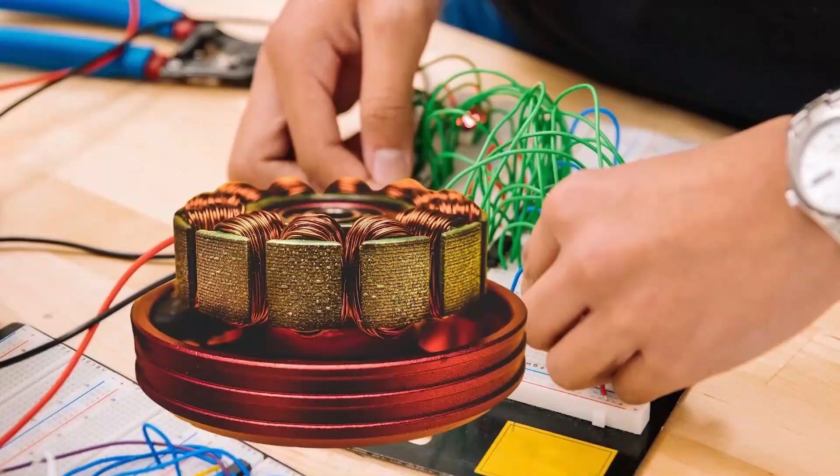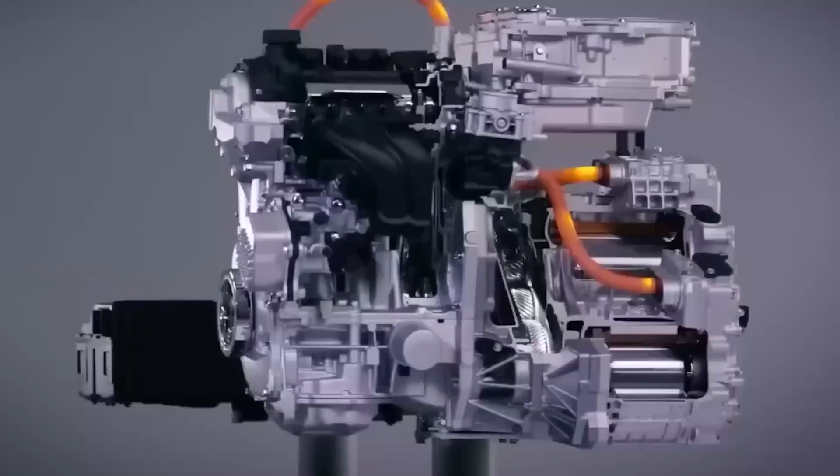With this idea in mind, he decided to create his own electric motor that did not rely on rare earth metals. After researching and experimenting, he found the solution in adapting a synchronous reluctance motor. Despite not having access to advanced resources, he managed to create a working prototype using a 3D printer and his

ingenuity. This achievement is not a surprise considering that the youngster had already completed more than 60 engineering projects, including robotic hands, a go-kart, and high-speed running boots. His passion and dedication make him an engineering prodigy.

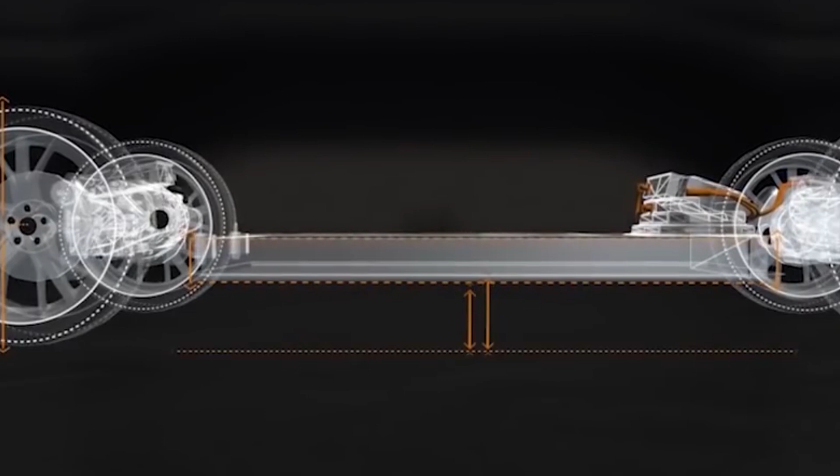Robert Sansone's electric motor started out as just another project, but recognizing the potential in it, he decided to turn it into a science fair project. His enthusiasm led him to compete at different levels until he reached the Regeneron International Science and Engineering Fair, where he won the first prize of $75,000.

With the money, Sansone plans to enroll at the Massachusetts Institute of Technology to further refine his model. Although he hasn't revealed all the details about how it works, he hopes car companies will take an interest in its electric drive to make a sustainable difference in the creation of electric cars.

However, the automotive industry is changing towards a 100% electric future, which brings with it the problem of the use of components such as rare earths in motors and batteries, elements that produce environmental and social impacts. Currently, more than 90% of rare earths are mined from China, which poses a challenge for the replacement of all existing vehicles with an electric one.

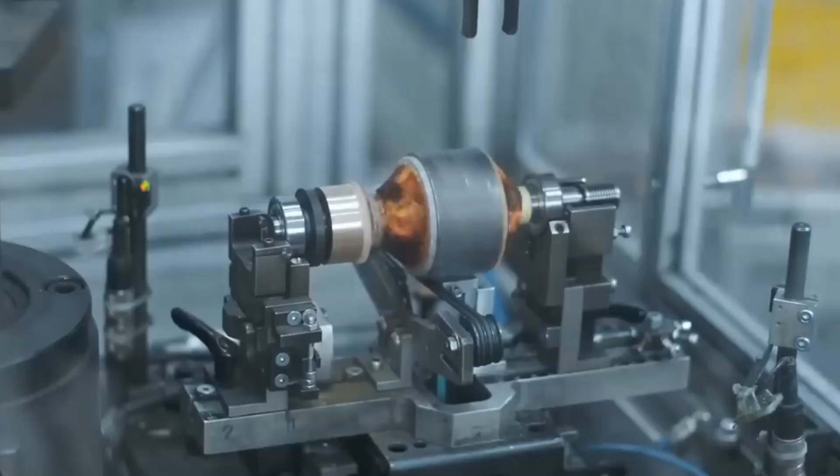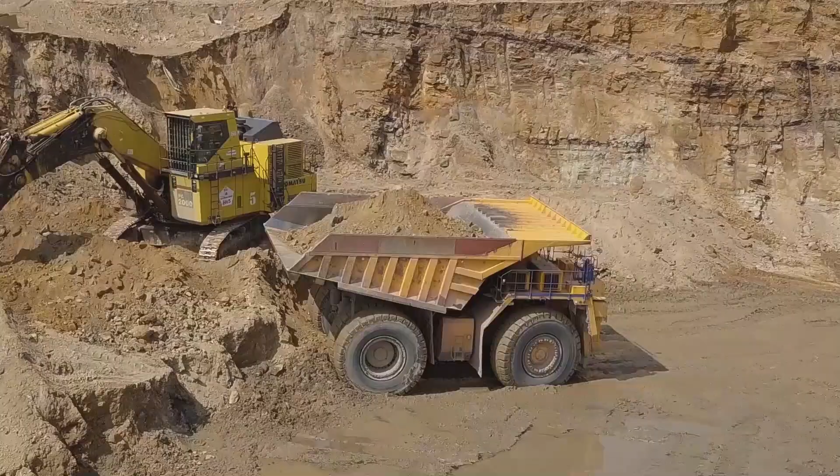A University of Michigan professor explained that many of the materials used in engines are mined in China, which makes their price tied to trade status with that country. Rare earths, from which 17 chemical elements such as scandium, yttrium, and lanthanum are extracted, are essential for generating clean energy, but they are also highly polluting. Although they are found in nature, their low concentration makes their commercial exploitation difficult.

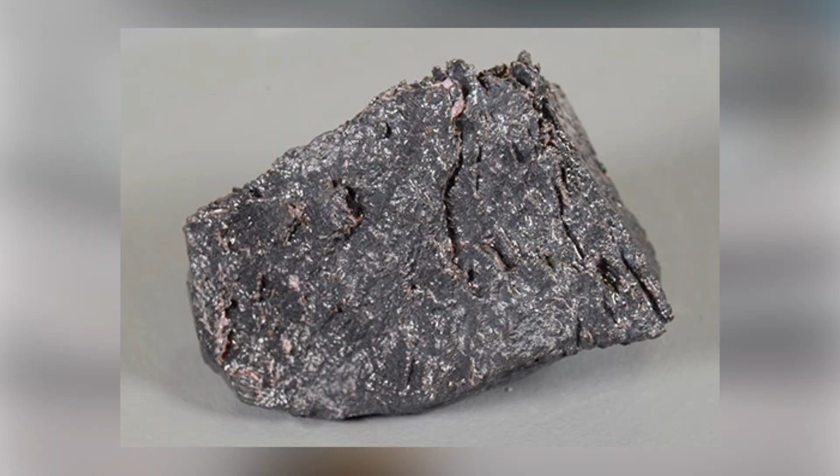Rare earth metals, such as neodymium, dysprosium, and terbium, are used in the construction of electric motors and electronic devices, as they are used as magnets to prevent overheating and improve performance. In addition, the military sector also depends on these elements. U.S. President Joe Biden has a goal for 50% of cars sold by 2030 to be electric, but current demand for rare earths makes this difficult to meet.

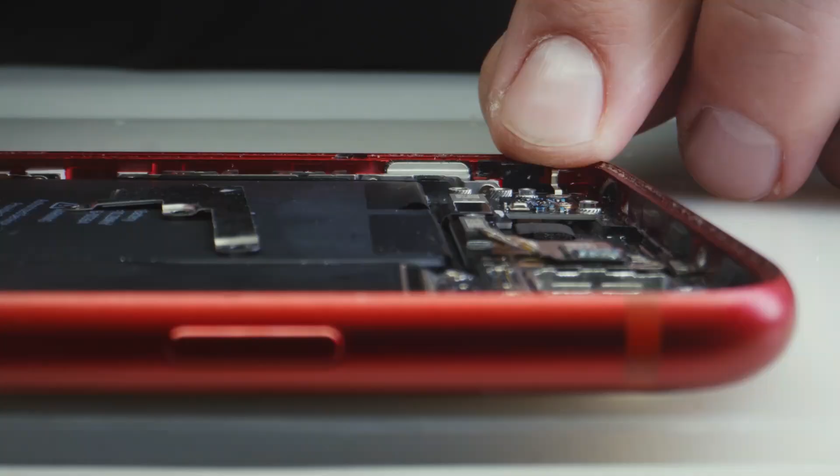Furthermore, countries like Germany, Japan, and Korea also require large amounts of these elements for their electrification goals. Due to shortages in the United States, the possibility of collaborating with Australia and Canada to obtain and process rare earths in the state of Texas is being explored.

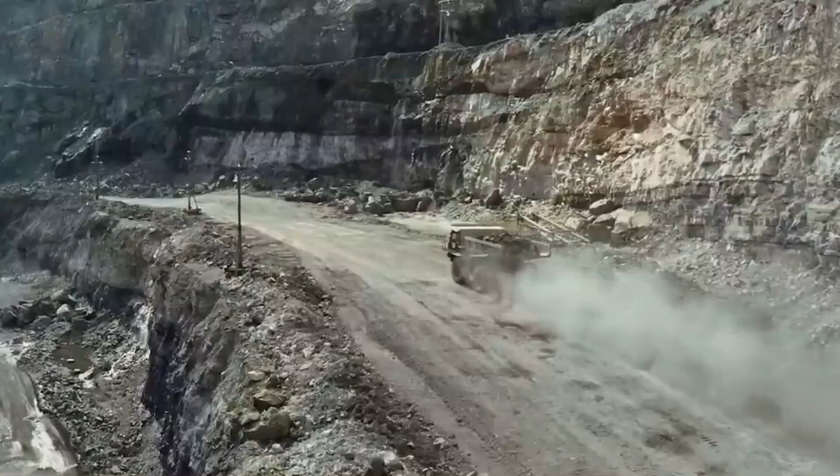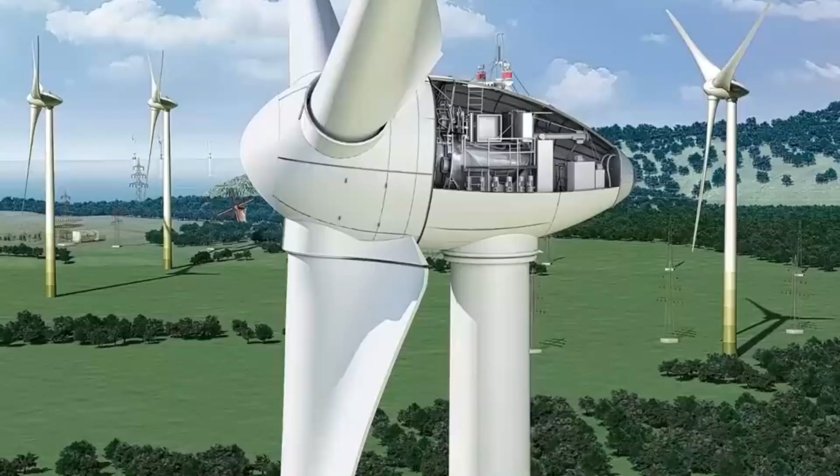Although we face challenges such as high production demand, high costs, and environmental pollution associated with the use of rare earths in electric motors, removing these elements from the equation could solve many of these problems. For this reason, Robert developed an alternative with his synchronous reluctance motor that does not require rare earths.

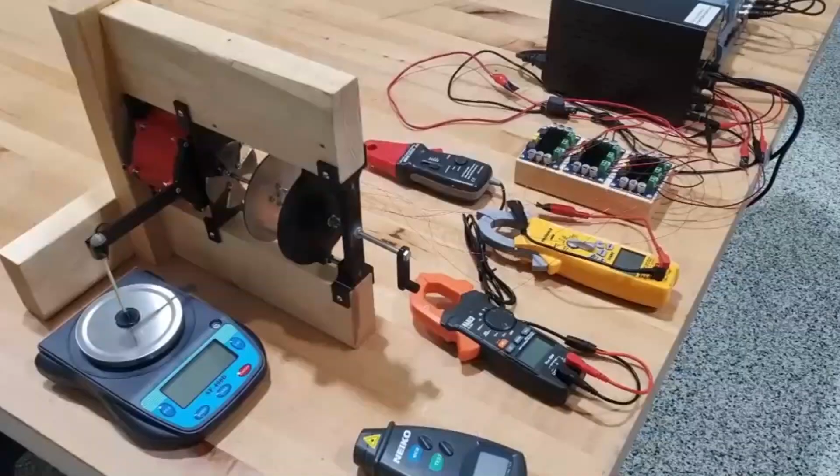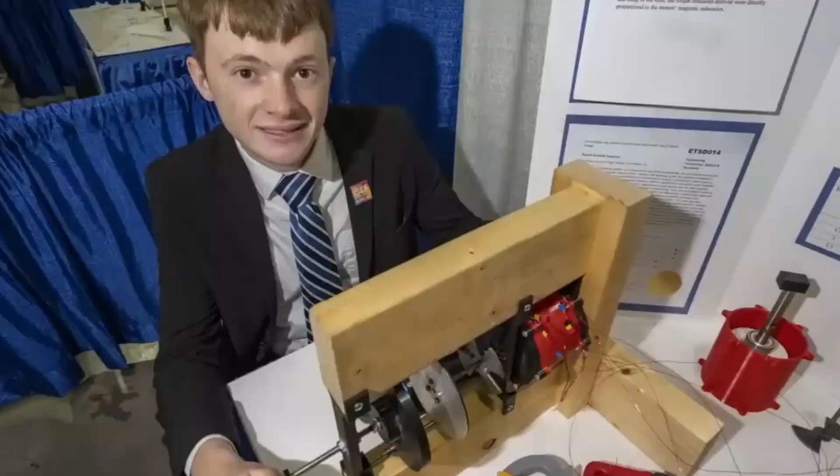Magnets are an essential component in everyday life, used in numerous electronic devices and turbines. And growing demand from the automotive and clean energy industry has increased the need for rare earth metals. Although neodymium magnets are the most powerful, their scarcity has led to a search for substitutes, such as cerium. However, more studies are needed to determine its potential.

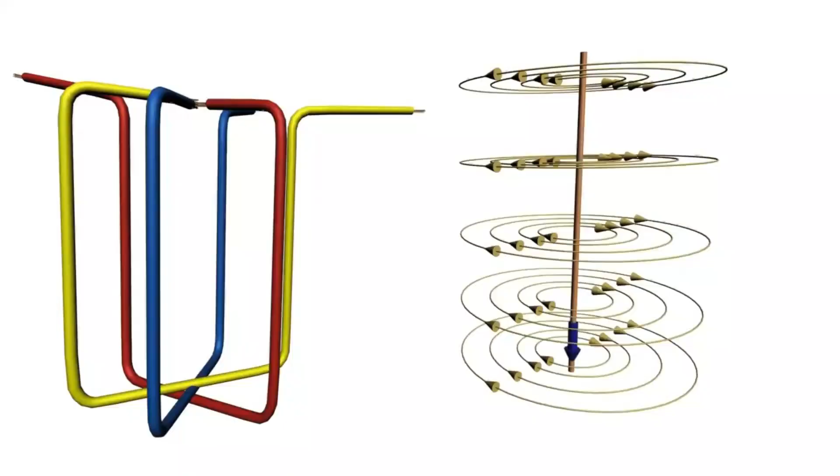In an electric motor, electrical energy is converted into mechanical energy through a coil that, when passing through a magnetic field, generates a force that produces a rotational movement, torque, and therefore a mechanical force that is transferred to the wheels of the car to achieve its movement.

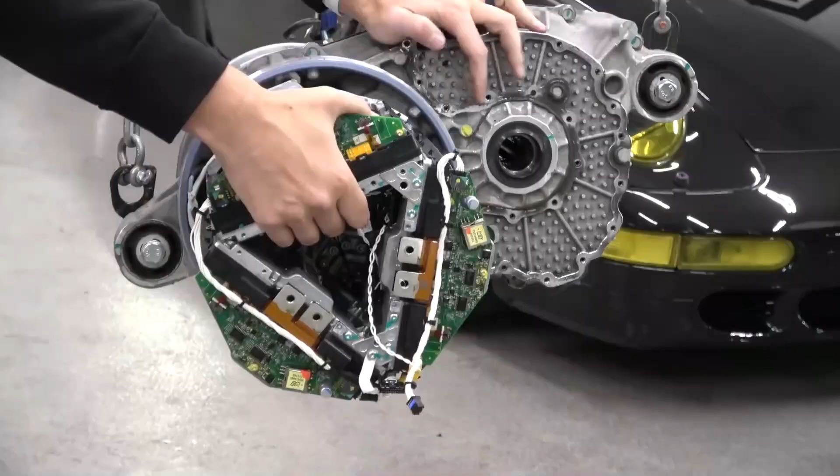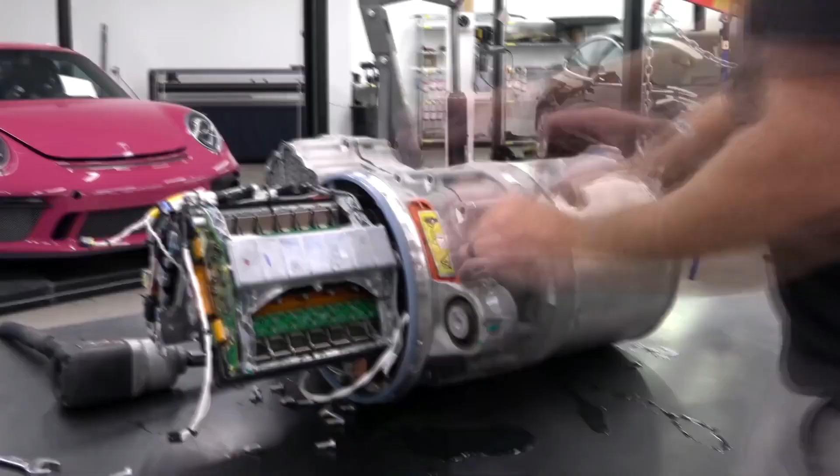The center of the electric motor is its armature, a metal loop that when connected to a current becomes a large flat magnet with a north pole and a south pole that can be switched by reversing the polarity. In a DC motor, curved north and south pole magnets form a stator, while the armature rotates to align with the stator's magnetic poles, producing mechanical energy when the polarity is reversed.

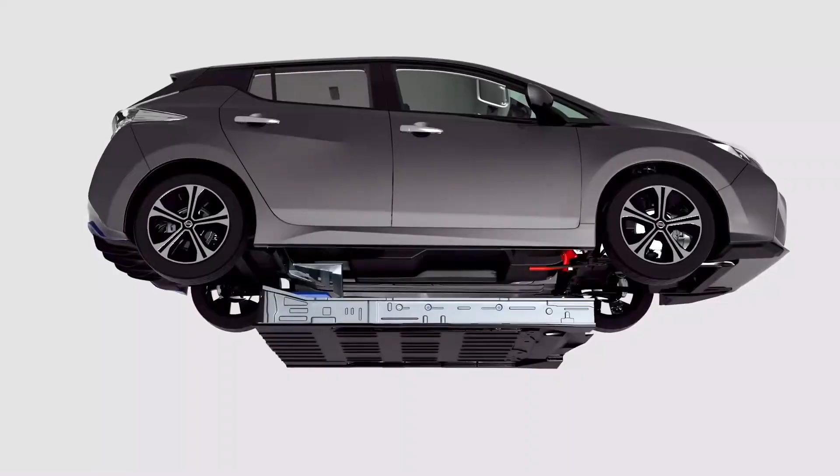Alternating current motors, for their part, use energy sent to the stator coils to produce a magnetic field in the rotor, which moves trying to reach this rotating field. These motors do not need permanent magnets and were popularized by the inventor Nikola Tesla, being used by 70% of companies today for various purposes.

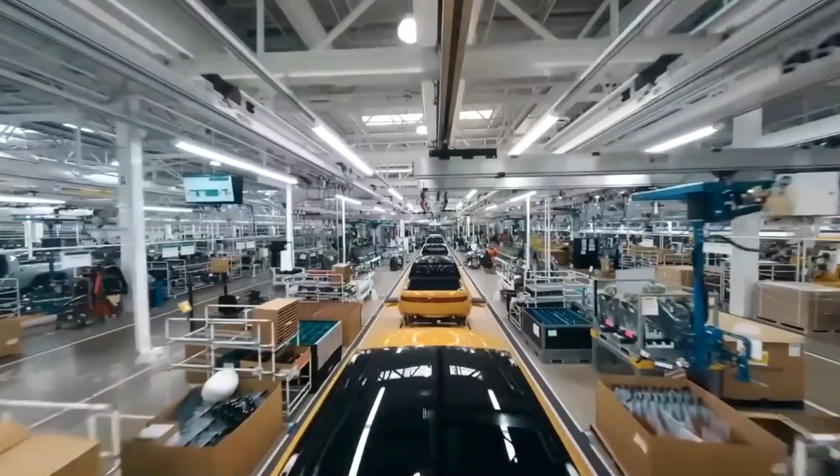Consequently, Sansone created a prototype motor that does not rely on rare earth metals by using a synchronous reluctance motor instead of one with permanent magnets. This type of motor uses a steel rotor with slots cut, which increase the difference between the low magnetic reluctance of the rotor and the high magnetic reluctance of the slots, increasing the motor's saliency ratio and therefore power.

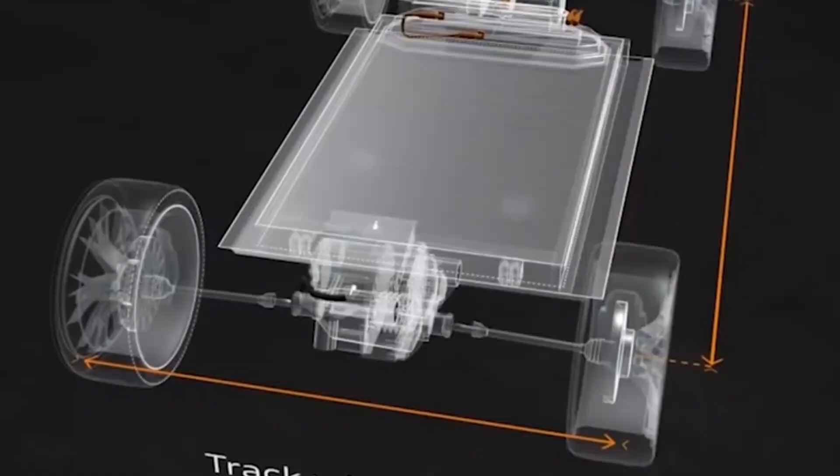Although automakers don't use this type of motor because they don't consider it as efficient for electric cars, Sansone has shown that it's possible to make a synchronous reluctance motor as efficient as one with permanent magnets by removing the air gaps and adding another magnetic field.

Sansone's prototype showed that this type of engine can produce 39% more torque and be 31% more efficient at 300 RPM. Furthermore, if this type of motor were to be implemented in the automotive industry, electric cars would not need permanent magnets and therefore would not be dependent on China's rare earth monopoly. This would reduce the environmental impact and the price of electric cars, making them more accessible to consumers.

Robert Sansone's success in his high school science project bodes well for his future. He is expected to be a promising candidate for the Massachusetts Institute of Technology as an engineer, although his synchronous reluctance motor still needs to undergo several phases of testing to demonstrate its true potential. The current results are promising.

As we live in a time of energy transition, it is important to reflect on the best options for our future, as some clean energy projects may have underlying environmental issues. So it's crucial that brilliant minds like Robert's get the support they need. Do you think Sansone's engine could be used in the automotive industry?